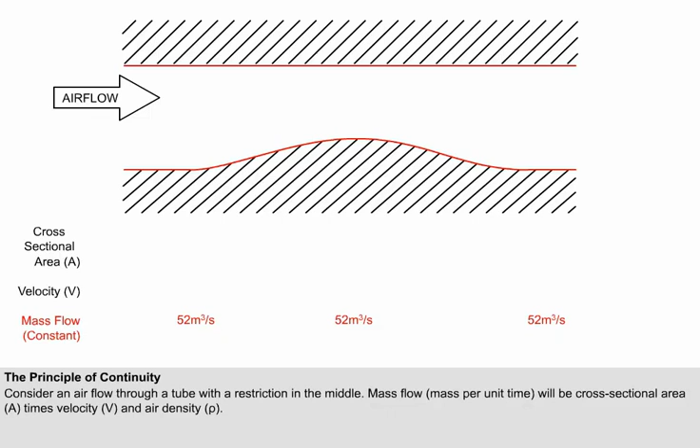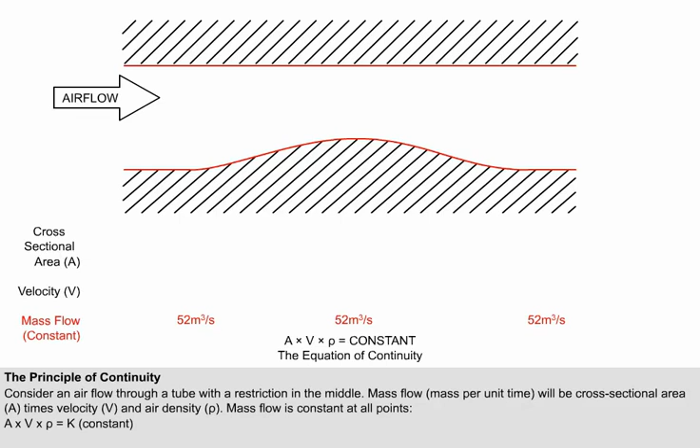The mass flow will remain constant at all points along the tube. The equation of continuity is A times v times ρ equals constant. Because air is a compressible fluid, any pressure change in the flow will affect the air density. However, at low subsonic speeds, less than Mach 0.4, density changes are insignificant and can be disregarded.

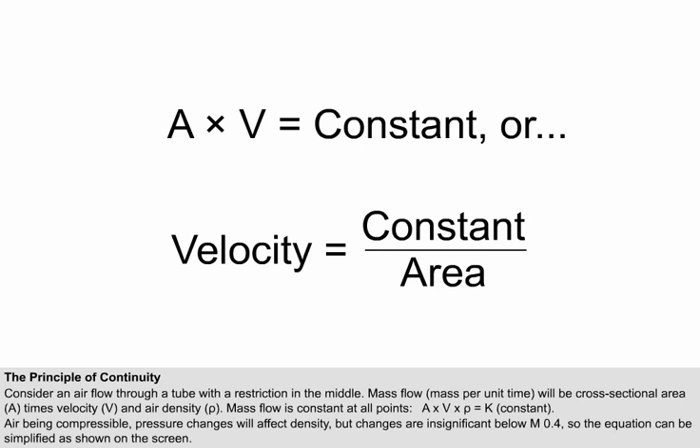The equation of continuity can now be simplified to A times v equals constant, or, when we rearrange it, velocity equals constant divided by area. Because the mass flow must remain constant, it can be seen from the equation of continuity that the reduction in the tube's cross-sectional area results in an increase in velocity, and vice versa. The equation of continuity enables the velocity changes of airflow around a given shape to be predicted mathematically for speeds below Mach 0.4, which is around 260 knots at sea level.

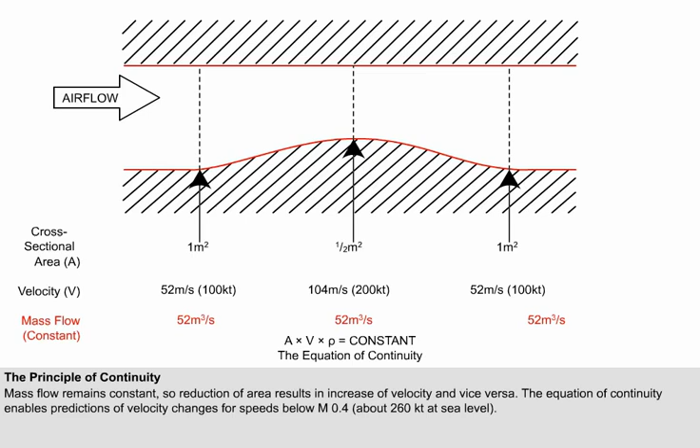Associated with the principle of continuity is Bernoulli's theorem, propounded by 18th century Dutch-Swiss mathematician Daniel Bernoulli. His theorem states that, in the steady flow of an ideal fluid, the sum of the pressure and kinetic energy per unit volume remains constant, or, more concisely, the sum of the energies present remains constant. In this context, an ideal fluid is both incompressible and has no viscosity.

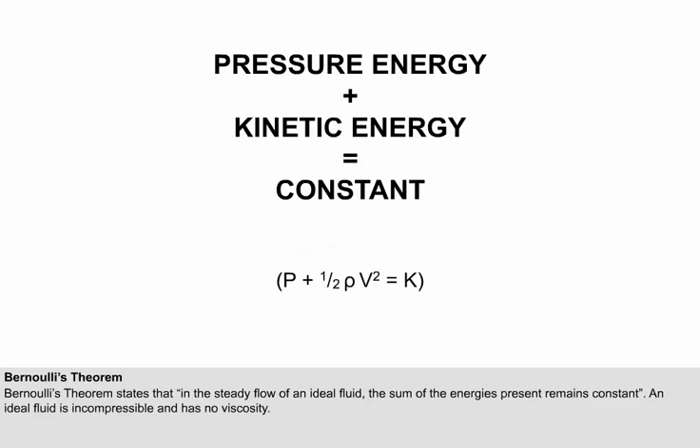The theorem can be expressed as pressure plus kinetic energy equals constant, or P plus half ρ v squared equals K. Let us consider a mass of air at ISA conditions, moving at 100 knots or 52 meters per second. Static pressure is 101,325 newtons per square meter, density 1.225, giving a dynamic pressure of 1656 newtons per square meter. Pressure energy 101,325 plus kinetic energy 1656 equals a constant 102,981 newtons per square meter.

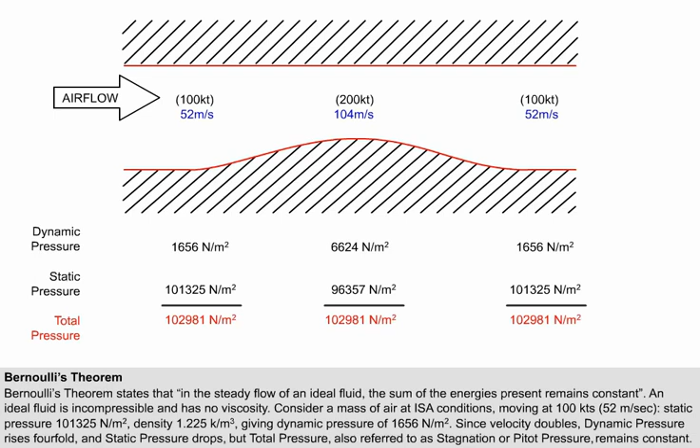Because the velocity of the airflow at the throat has doubled, its dynamic pressure has risen by a factor of 4, and the static pressure has decreased. But the total pressure, the sum of static and dynamic, has remained constant. This constant can be referred to as total pressure, stagnation pressure, or pitot pressure, according to context.

The tubes used in the diagrams just shown are used only to demonstrate the principle of continuity and Bernoulli's theorem, and are not devices which could make an aeroplane fly. However, an aerodynamic force to oppose and exceed the weight of an aircraft can be generated by a specially shaped body called an aerofoil. The airflow over the top surface of a lifting aerofoil will be at a greater velocity than that beneath, so that the pressure differential will result in a net upwards force per unit area. The bigger the surface area, the larger the force generated.

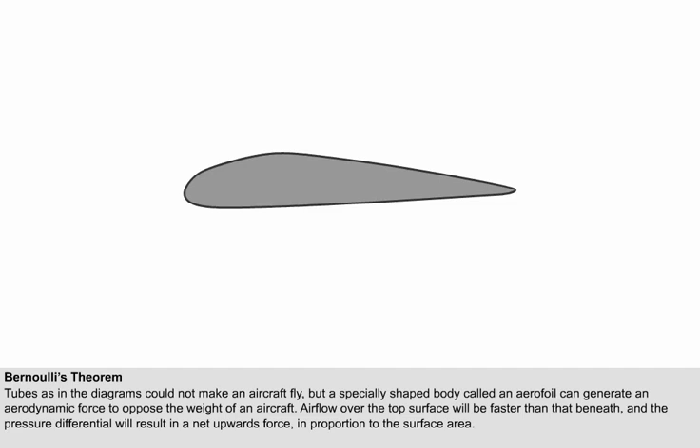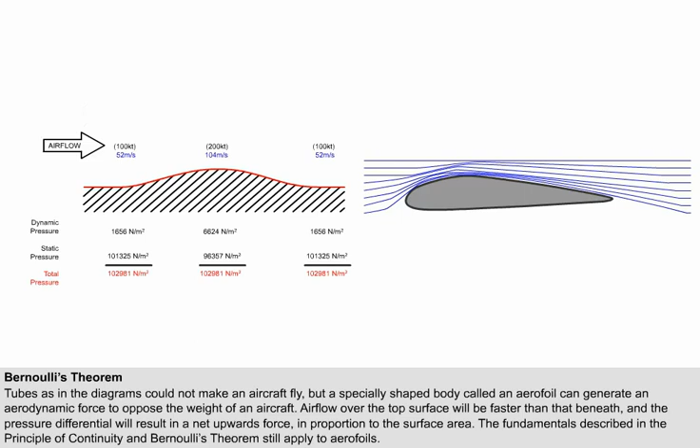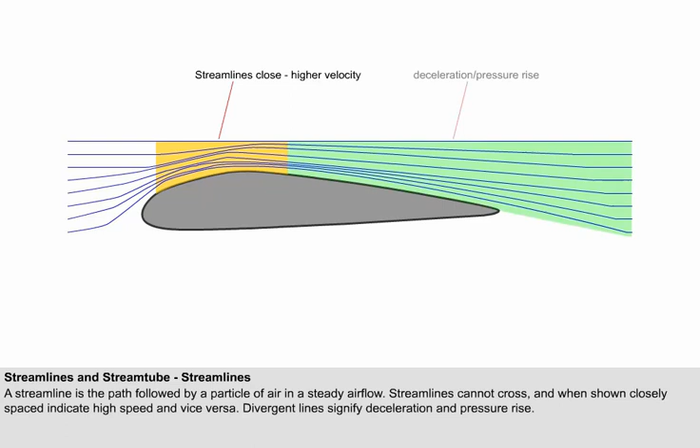Next, we shall see the similarity between the flow over the aerofoil and the flow through the tube used in describing the principle of continuity and Bernoulli's theorem, and that these fundamentals still apply to aerofoils. A streamline is the path followed by a particle of air in a steady airflow, and one streamline cannot cross another. When they are shown close together, it indicates increased velocity, and when wide apart, decreased velocity. When streamlines diverge, it indicates decelerating airflow and the associated rise in pressure, and converging lines, acceleration with decreasing pressure.

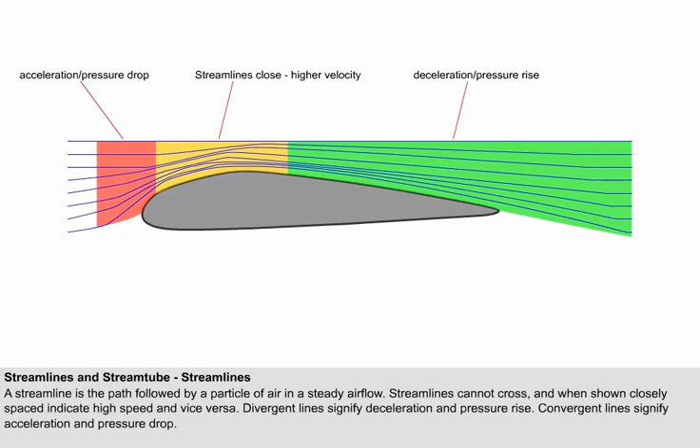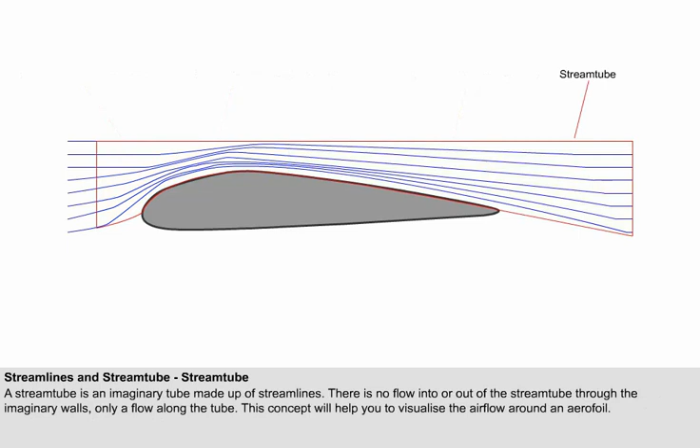A stream tube is an imaginary tube made up of streamlines. There is no flow into or out of the stream tube through the imaginary walls, only a flow along the tube. This concept will help you to visualize the airflow around an aerofoil. To grasp the basic principles of aerodynamics, you will need to understand the principle of continuity and Bernoulli's theorem. We can summarize the relevant elements as follows.

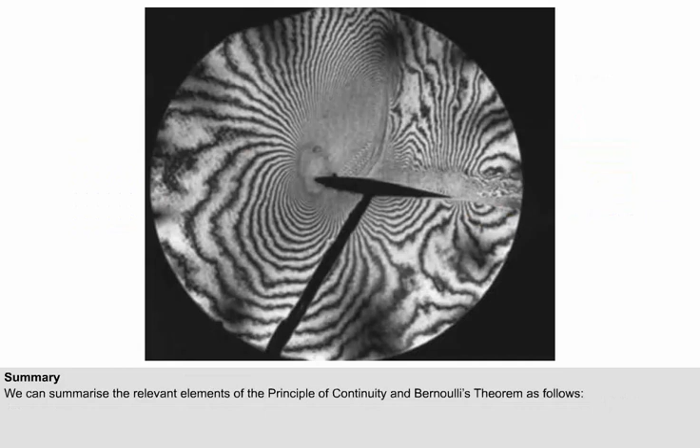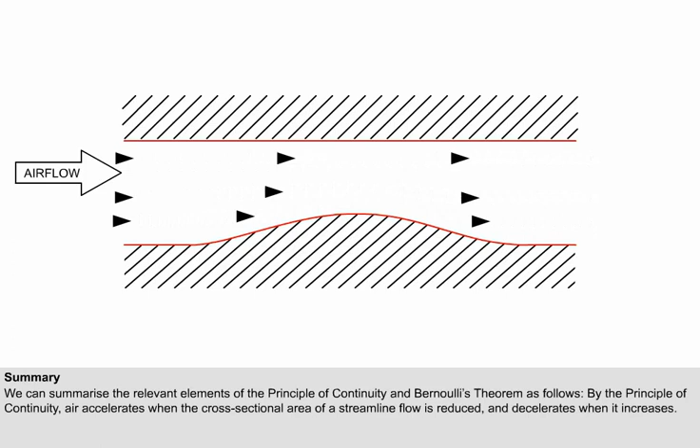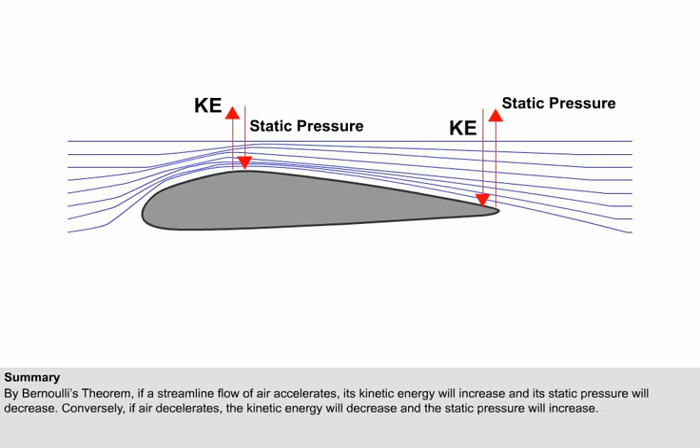By the principle of continuity, air accelerates when the cross-sectional area of a streamline flow is reduced, and decelerates when it increases. By Bernoulli's theorem, if a streamline flow of air accelerates, its kinetic energy will increase and its static pressure will decrease. Conversely, if air decelerates, the kinetic energy will decrease and the static pressure will increase. Additionally, it should be remembered that these pressure changes will not affect air density at speeds below Mach 0.4. By using these effects, an aerofoil can generate the aerodynamic forces required for flight.